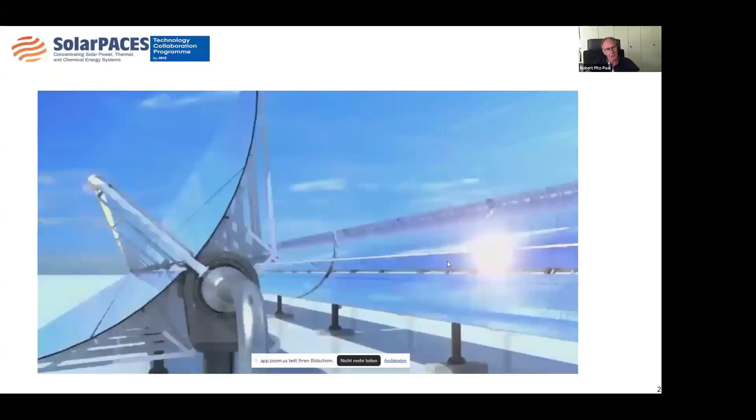Before I go into details, let me make sure you're all aware of concentrating solar technology. This is a brief animation showing the principle: when you concentrate sunlight, in this case on a parabolic trough collector, you're able to achieve very high temperatures, like 400 degrees centigrade.

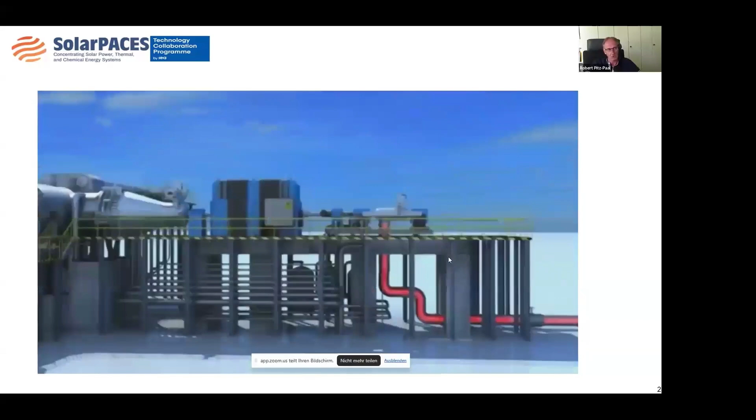This energy can be used, for example, to generate steam, which can then be used for process heat applications, but also, as shown in this video, for generating electricity. This is typically a large-scale application, done in many megawatts. One nice thing is that the energy can also be stored effectively and easily as thermal energy, typically in molten salt, and used to continue operation during nighttime or cloudy periods.

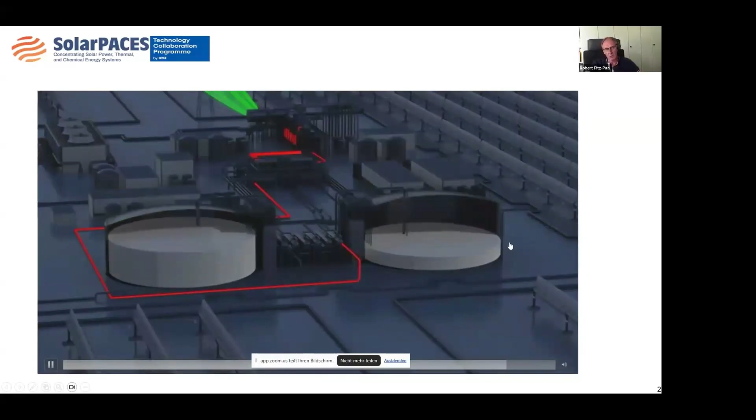So just to make sure we're all talking about the same topic: SolarPACES is the implementing agreement, the technology collaboration program working on this kind of technology. Our vision, linked to concentrating solar technology, is that it becomes an option to significantly deliver clean, sustainable energy worldwide.

As an international association, our mission is to facilitate technology development, market deployment, and energy partnerships by providing leadership as an international network of independent experts.

Interestingly, the technology has ramped up in several phases in different areas around the world. Overall today there's 8.5 gigawatts operational, about 4 gigawatts under construction, and China is currently a big hotspot for the technology, particularly for electricity generation, but we also see activity in other countries, like Mexico.

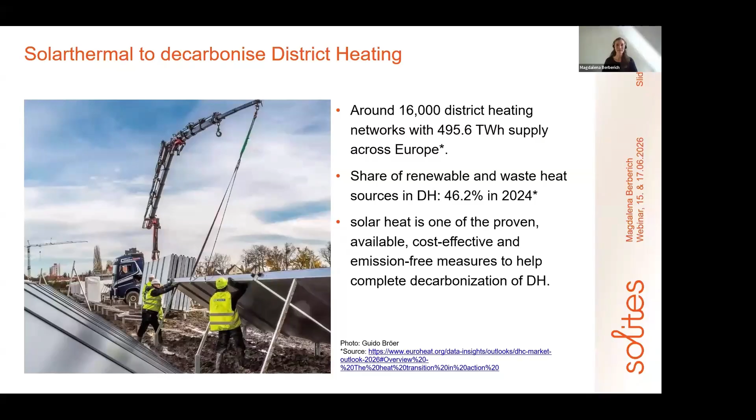And the good news is around Europe, there are a lot of towns and cities already using solar district heating. Here, for example, in Denmark, there's a large share of solar district heating, in the Netherlands, in Germany, and in Austria. These are the markets with the highest numbers of plants or installed capacity. And there are newcomers, other countries also installing new plants. So there's a lot of development here.

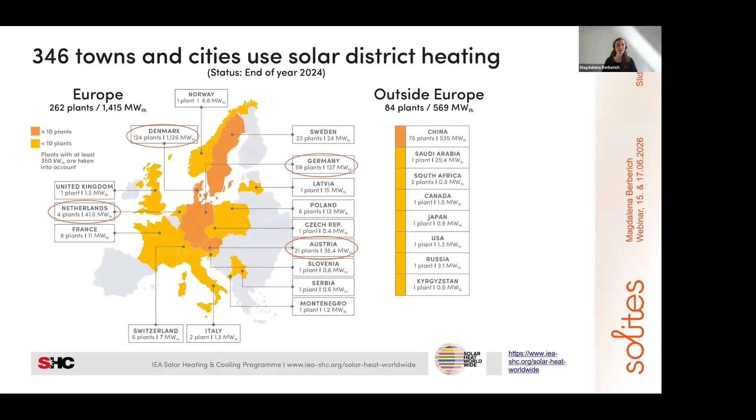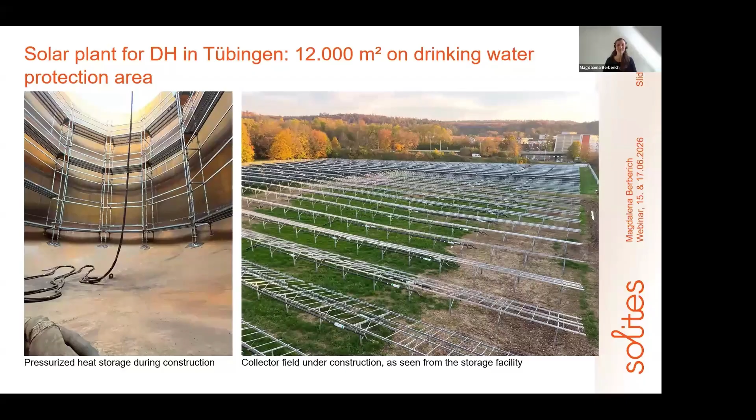Next step in size, we have now the largest solar district heating plant in Germany, now in Leipzig. This week it will go into operation. It's 65,000 square meters of collector field, and it's just 2% of the solar share of the district heating, because the district heating of the city, you can see it in the background, the city area, the district heating is a very large one. So the collector field can supply 2% of it.

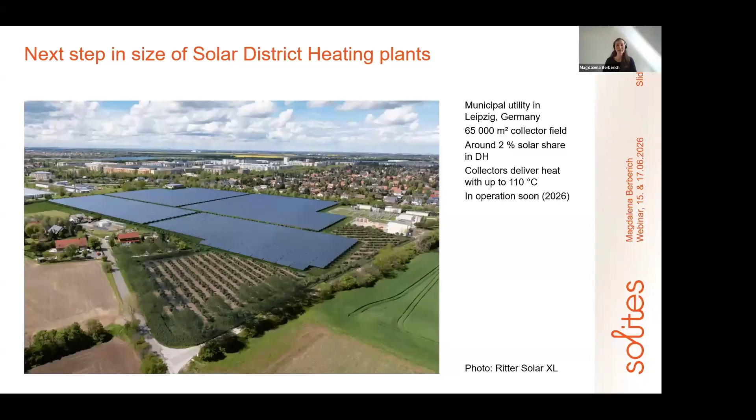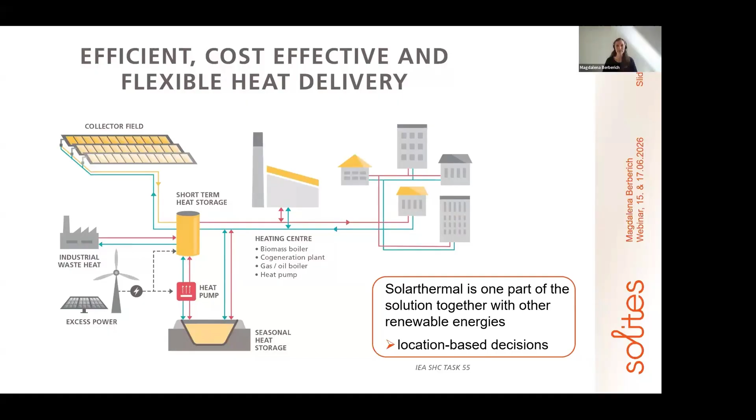This is very important to know, that of course solar thermal can be one part of the solution, together with other renewable energies and with other technologies. So it's everywhere important to take location-based decisions and not to say it's one system everywhere - this will not be possible. But we need to see the whole system, to see that solar thermal is one part, that there are other technologies which need to be considered, that a whole system is responsible for the heat supply and not only one technology. And thermal energy storages are also a very important part of the systems to manage the heat supply and the different technologies.

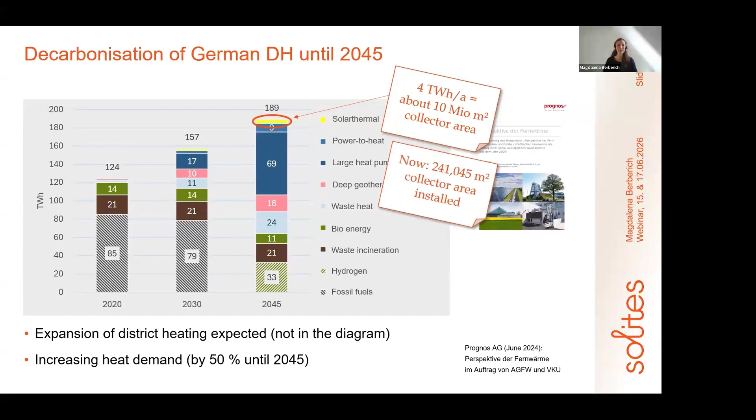The next part, in 2023, there's also a problem with the building permits. It took long time in 2023 and still takes long time to get building permits, of course depending on the local situations. This can also be part of why it takes long to install plants and why the market can't increase. So it's very important to consider on the policy side not to hinder the market on new installments.

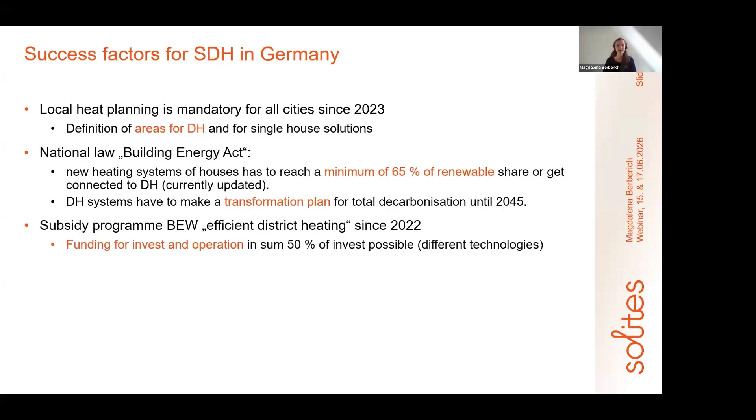There are subsidy programs like BEW, with funding for investment and for operation. In sum, it's possible to reach 50% of the investment. This funding is for different technologies, so it's not only solar thermal, but also heat pumps, for example.

R&D activities are important to push the development and the market, and best practice examples, of course, where people can see how it works in other places, and know-how transfer like today.

I want to tell you also that we were active in IEA SHC Task 68, where the topic was large-scale solar district heating in different technology combinations and different sub-activities. Results included, for example, a technology position paper where everything is summarized from the results. There are a lot of technical reports, webinars and videos, so you can have a look, and I'm sure there's something new for you included, where you can learn something about the technology and the systems.

New within IEA SHC are the collaboration groups, Lucio told already, and I just want to add that we have a joint meeting at EuroSun. There will be a session to introduce the collaboration groups, so I'm very looking forward to seeing some of you there. The registration for the collaboration groups will be available soon as well, so if you're interested, I'm happy to see your registration.

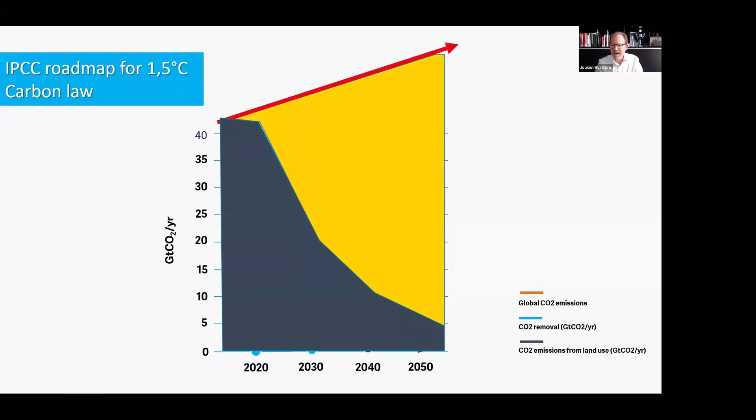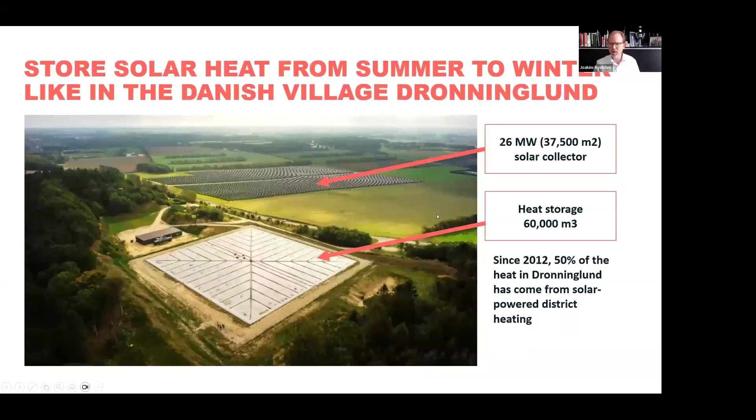I think that storing heat from summer to winter is one of the keys, using solar thermal, like here in Dronninglund, collecting it with solar collectors and storing it in, for example, pit storage or borehole storage for winter. Here you can see how simple it is. You have the solar collectors, you dig a big hole, you put a liner inside, you fill it up with hot water in summer, and you can use the hot water all year round.

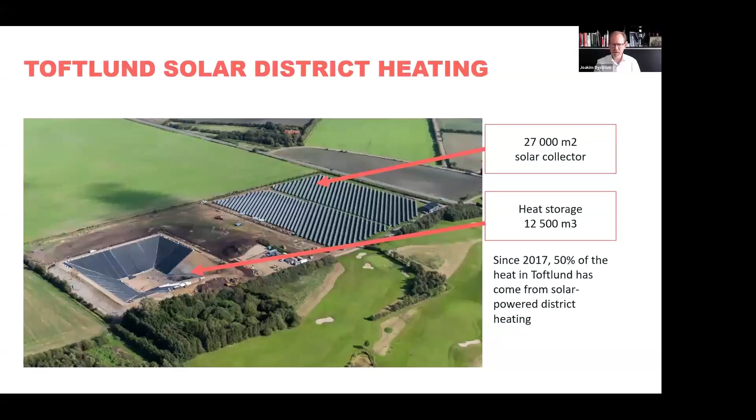Unfortunately, this technology has been under the radar, I would say. The EU Commission and other European bodies have not taken much notice of this technology. But now, with this crisis, on the 22nd of April the Commission published a number of actions, and one of those actions was to help develop public support schemes for large-scale solar thermal projects, and to see that solar thermal becomes one of the pillars in the transition away from fossil fuel and to a more resilient Europe.

Absolicon's part in this is working with large fields. There has also been another Scandinavian, Nordic company working with large-scale installations, Savo Solar. Absolicon works with solar concentrators, and Savo Solar with flat plate collectors. We work more with industries, and Savo Solar works more with solar district heating. We have now decided to join hands. We have bought Savo Solar, and we will work together as one company.

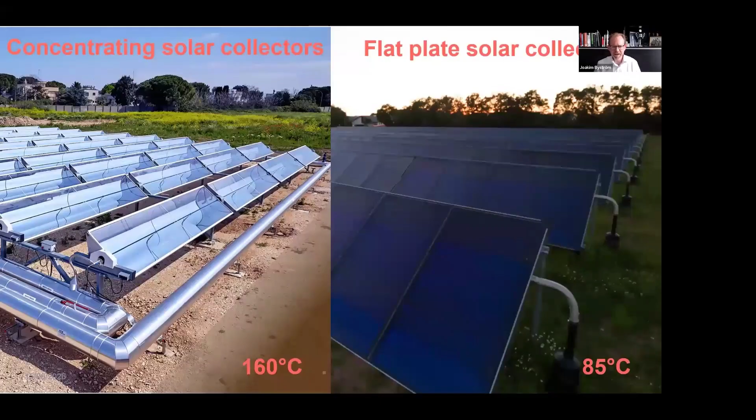We make solar concentrators, which you can see on the left side, producing up to 160 degrees, while Savo Solar manufactures this fantastic large-scale solar thermal flat plate collector. The production has stopped now, but we own all the patents to restart it. We will also cooperate with other manufacturers of large flat plate collectors.

So there are two very different principles. The Absolicon concentrator is 5.5 meters long, 1 meter wide, and it focuses the light like a magnifying glass to produce high temperatures. We have the world's highest optical efficiency for a small parabolic trough, with over 76%.

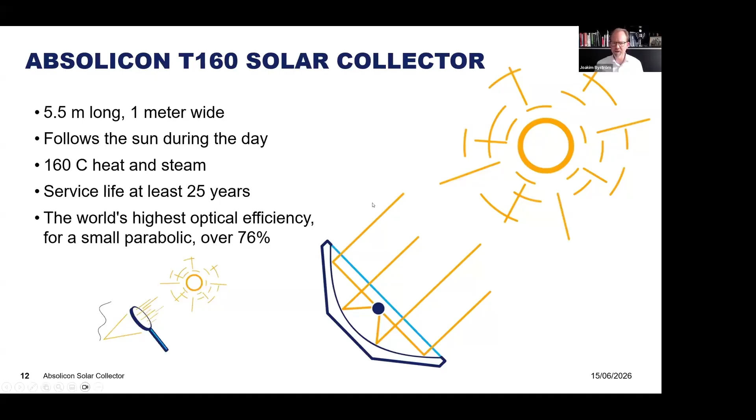The Savo Solar collector is a traditional flat plate collector where the sun shines on the flat plate, but maybe not so traditional, because Savo Solar had the idea of making a solid aluminum plate with channels inside, which gave them the highest efficiency for a non-evacuated flat plate.

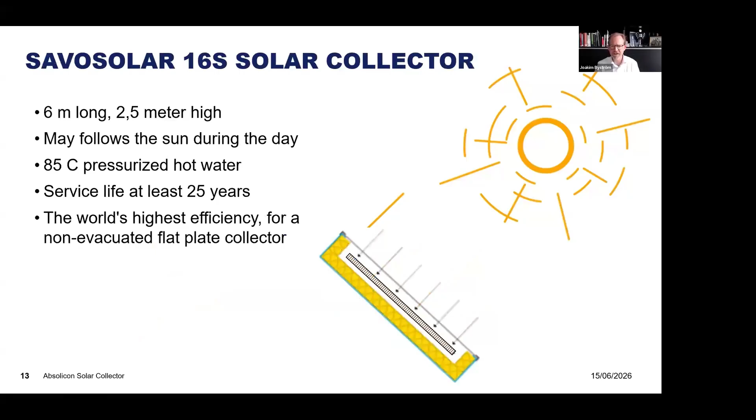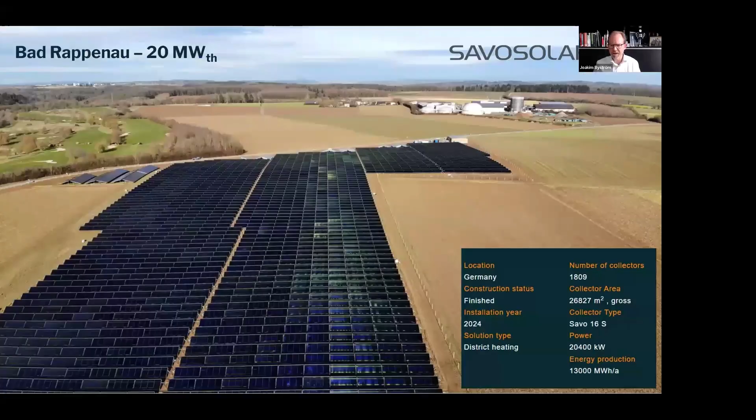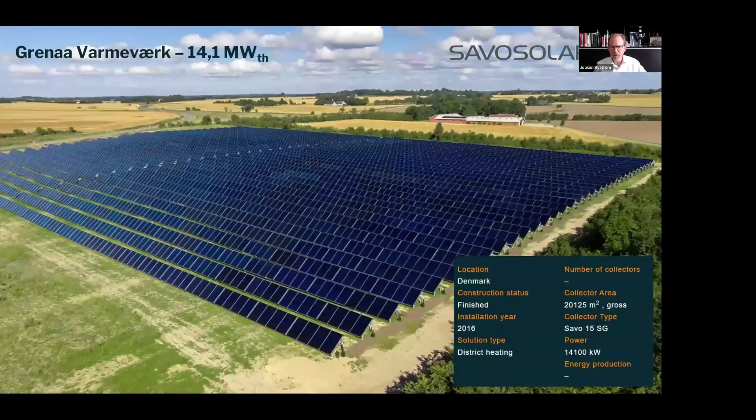So Absolicon and Savo Solar have both been in the solar district heating market. These are examples of installations that Savo Solar has built in Europe, but there are over 20 of them. Those large installations work exactly as we heard, providing heat for the cities. Savo Solar's installations work best at temperatures up to 85 degrees.

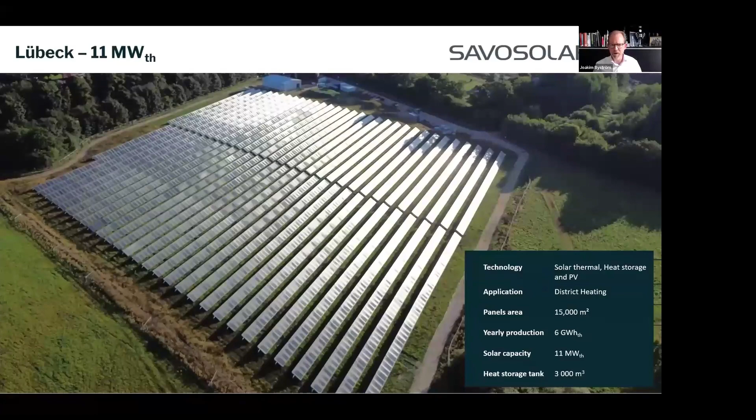But Absolicon has also built a few district heating connected installations, like this one in Högslätten, Sweden, where we produce up to 110 degrees Celsius. It's very easy to get high temperatures with the concentrators.

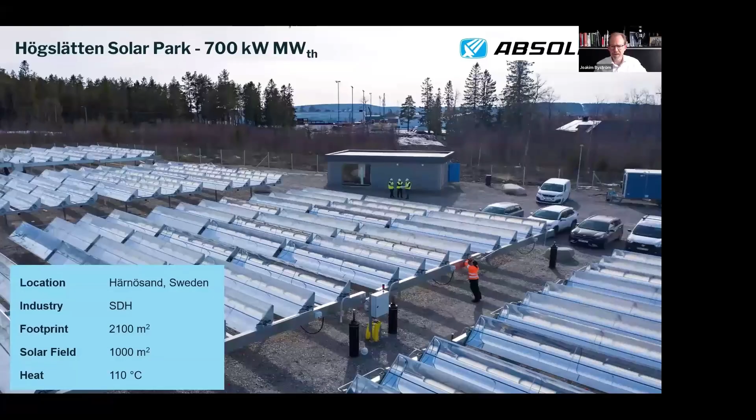And those two technologies can actually be combined. You can have flat panels take in the cold side of the district heating network and heat it up, for example from 50 to 70 degrees with a flat plate, where they are very, very efficient. But when you get above 70 degrees, the flat plates lose some of their efficiency. Then you can instead run the hot water to a field of solar concentrators and push up the temperature further. And if, like in Germany, you often have quite high temperatures in the district heating networks, you can add more concentrators and push up the temperature even higher, up to 120 degrees if you like, which might be suitable if you want to store the heat in a pressurized hot water storage.

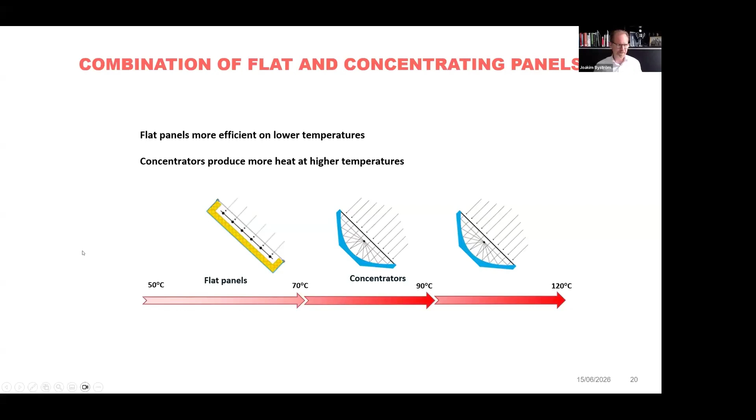Now, a few words about Swedish solar district heating. As I said in the beginning, people think the world is run on electricity, but in reality every little city in Sweden has a small district heating network. The red dots are fired with biofuel, the orange ones burn waste, and some burn peat, the yellow ones, and some are connected to residual heat from industries.

Burning waste has been the main way for a bigger city. But recently we had a new law about recycling, so all buildings in Sweden need a real recycling system for trash with 8 different fractions. This has reduced the fuel amount for waste incineration systems to 25% of what it was previously.

So now we are importing a lot of waste from, for example, Italy to run our waste incineration plants. I think this idea that we would burn waste is actually something that will pass, because we will recycle both paper and plastic, and then there's nothing to burn. We also make biogas from the food waste.

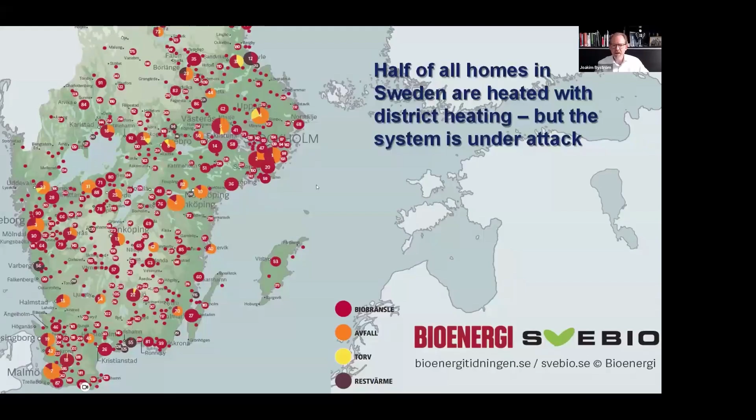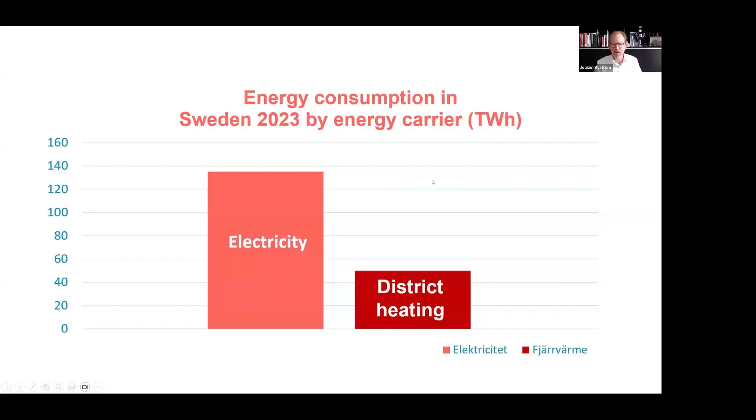The district heating system in Sweden is huge. We produce about 138 terawatt hours of electricity and about 50 terawatt hours of district heating. So it's really strange that no one talks about the district heating system in Sweden.

A typical district heating system in Sweden, for a small town like my hometown here in Härnösand, has many different energy sources. It has a wood chip boiler with a turbine for electricity generation, uses waste heat from a local pellet factory, has a pellet boiler for summer operation and peak load, a 20 megawatt electric boiler, and small oil boilers out in the network for backup. The cheapest heat is produced when the large wood chip boiler is used.

That is in winter. But in summer, the heat load is not sufficient to operate the big wood chip boilers. Instead they run the smaller pellet boiler, which means the heat is about double as expensive in summer as in winter. This is the case in many biofuel powered district heating networks around Europe, that the heat is most expensive in summer.

So a very logical thing to do when you want cost reduction is to stop burning in summer and use solar heat in summer, then burn wood chip in winter. But this message is really tricky. When we talk to people about solar thermal, they immediately think, oh yes, we want solar thermal in winter - that's the normal reaction. But no, you should use solar thermal in summer, when the heat is most expensive from your plant. I think slowly we are getting people to pick up on that.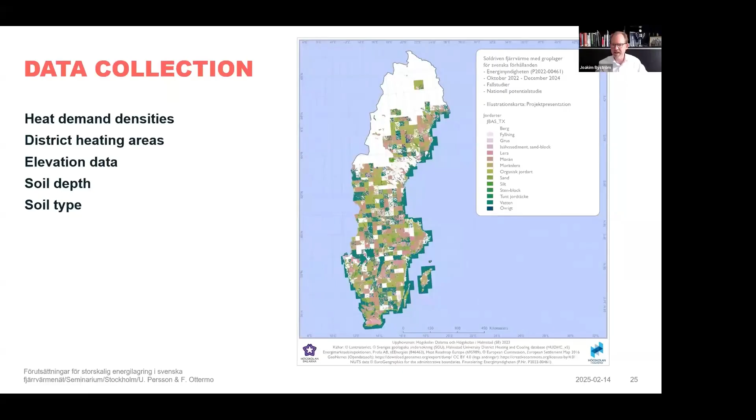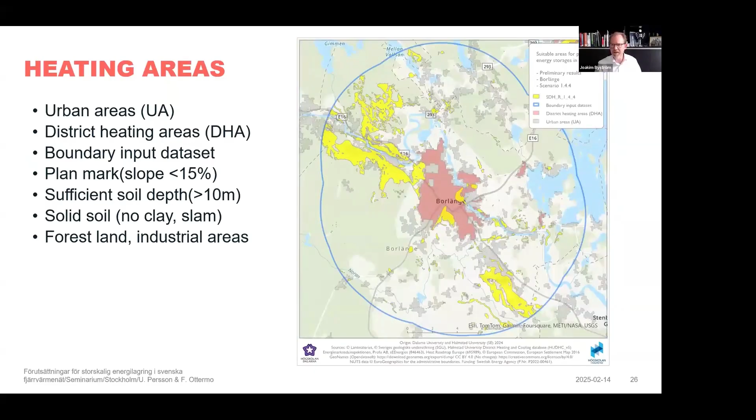We are super interested in those pit storages, and we have done a real mapping of Sweden with where we could build pit storages, based on soil depth, soil type, elevation data, and district heating areas. So for every Swedish city we have done this kind of area map where we mark up in yellow the areas suitable to build solar thermal and pit storages.

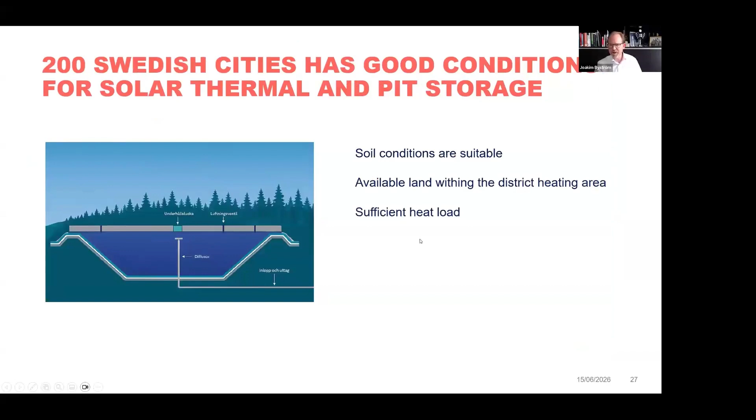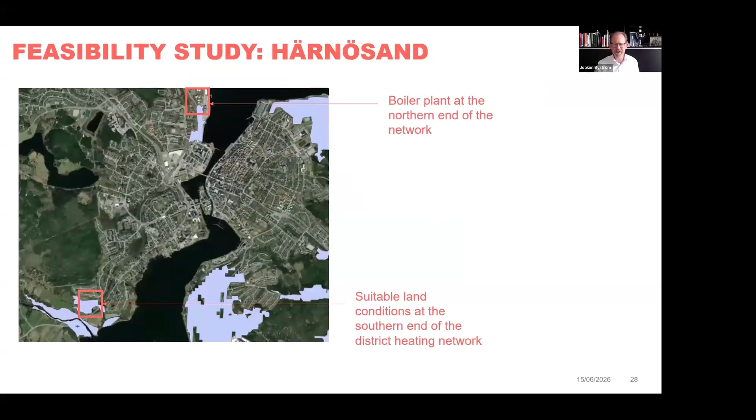What we found was that about half of all Swedish district heating networks, 200 Swedish cities, have good conditions for solar thermal and pit storage based on soil conditions, available land, and sufficient heat load. For example, in this feasibility study here in Härnösand, the bluish areas are where there are good conditions for a pit storage, and then we connect it to the grid, of course.

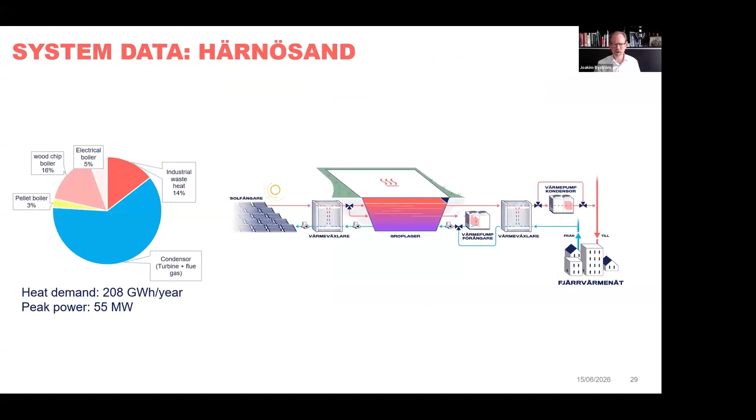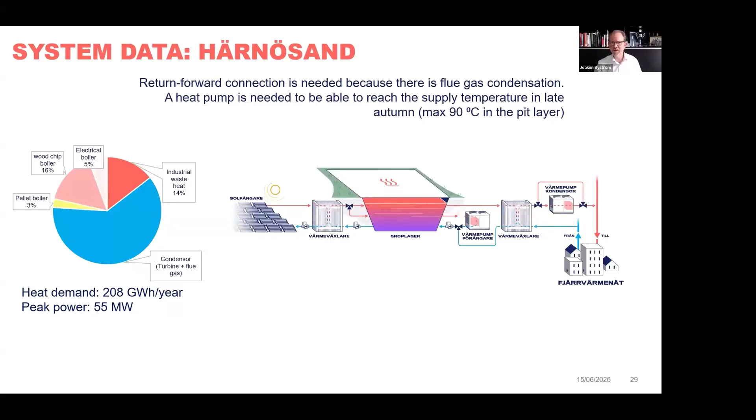In Härnösand we have different energy sources, and we propose a system with solar thermal and a pit storage combined with a heat pump to empty the storage fully. Here we need to put the heat on the return forward, as we have flue gas condensation - we cannot just put it into the return line. The result is that we get this kind of combination of different energy sources.

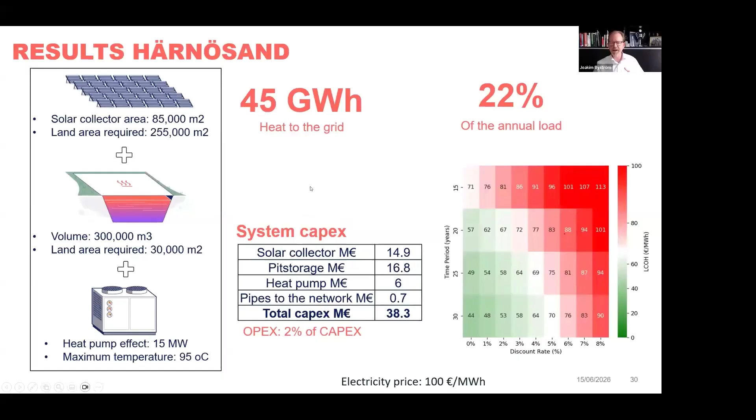Based on what discount rate you have, what interest you pay to the bank, and how long you expect the operation to run, you get different levelized cost of heat. So you see, with a 3% discount rate and 30 years, you get about 58 euros per megawatt hour. But this is with today's prices and without any subsidy, so I think there's a lot of price reduction to win here.

That I think is one of the key questions - how to make solar thermal even more profitable for the end users. Of course, more installations, larger installations, more competition is what will bring the cost down. We saw this very clearly in Denmark, where for a few years we had a working solar thermal market. Continued R&D is also part of it, but I think this is also driven by having a real, mature market, which results in economy of scale with improved subcontractor networks and logistics. That's what, like the invisible hand, pushed down the price of the installations.

We have the help now of the idea of the European Commission that they want to push large-scale solar thermal projects. The important thing is that the support and the idea of the countries is that we should have the same kind of development that wind and PV had. Not just a small subsidy that makes a few installations, but the idea of how many installations do we need to get a mature market where the prices are pushed down so that it can outcompete fossil fuel.